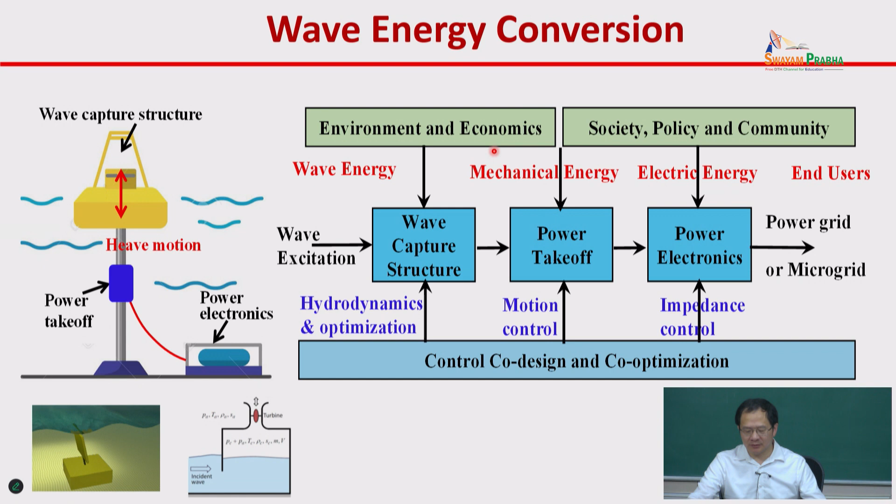And not only this control, hydrodynamics are important, right? The capture width ratio, how much energy gets converted to mechanical energy, is an important concept. Here you have motion control and impedance control. So control includes hydrodynamics control, motion control, and impedance control in power electronics. As I said, in the second half today we are going to talk about community, society, and environment for the design side.

Recall that capture width ratio is mechanical energy over wave energy. So total wave-to-wire efficiency includes capture width ratio and PTO efficiency. For certain devices we built, capture width ratio gets 50-60%, and PTO efficiency gets 50-80%. Keep in mind this is the best so far, and it's in a large range. For example, if you drive a PTO at a smaller load, the efficiency can be very small. The design is very important to make sure that the maximum efficiency of the two happens at the same condition. In that way, you have better power output.

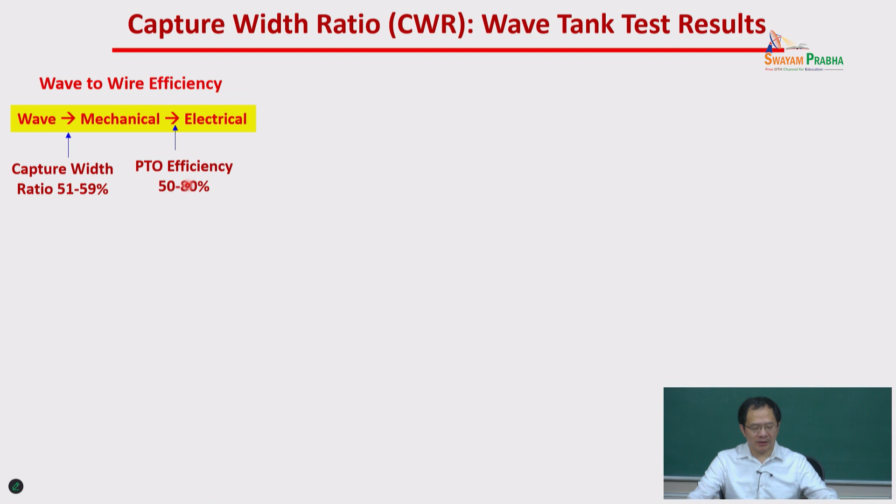So here, as you can see, the capture width ratio for different structures: a two body system has about 50 to 60%, the reference model 28%, and a single body 40%. And this depends on wave input. Here the wave flux for the scaled model is 7.4 watts per meter, corresponding to about 60 kilowatts at full scale. So if the input condition changes, the efficiency changes.

Okay, so and this capture width ratio. And overall, like this system, we get a 20% efficiency. As you can see, the power output, power history, and square root power corresponding to the voltage.

Here we use constant resistor. So the peak to average ratio is about 15, if you consider the root mean square of voltage is 4 times, right? So this 15 drives our design tool, because our PTO and all the motion transmission and power generator, and also power electronics, we need to handle the worst case, the big power, right?

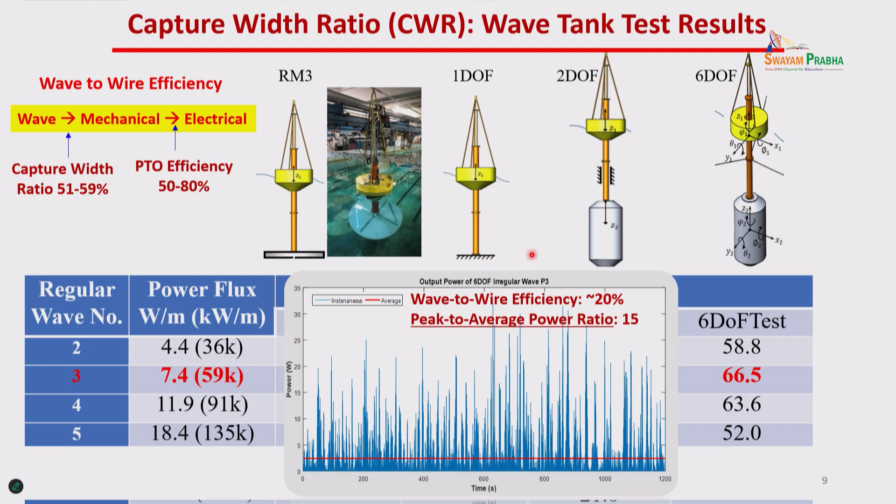Where we produce average like this. Okay, so now how to achieve best efficiency, we need to consider all this, right? And control can play an important role. This one I take from this reference paper. Okay, variable geometry wave energy converter design.

So it's written by Nathan Tom at NREL, and he provides this figure. As you know, you have wave amplitude, right? The wave is really small, like wind energy, very small. You have cut in speed. Below that, you don't generate energy, right? Like if wind speed is too large, you knock down the wind turbine, you don't generate electricity. Wave follows similar, right?

So at small wave speed, you don't generate energy, and if wave amplitude is above a certain number, okay, then you shed the load and make it flat, right? Then you have cut off, you just knock things down.

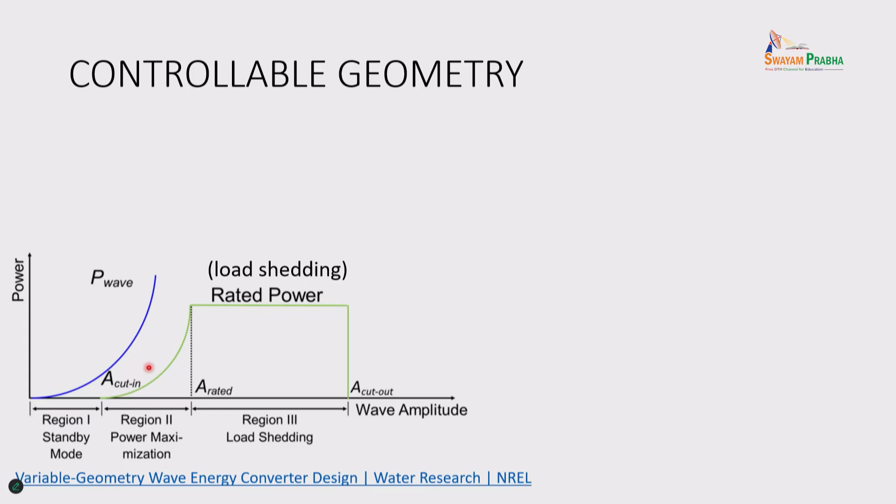This region is important, and for certain areas, for example, recently I traveled to Taiwan, and the collaborator said, okay, in Taiwan we need energy in the summer, because summer they need air conditioning, and wave energy is very small in summer, very large in the winter, right? So they don't want to say, okay, cut in this one, we want more to the left side as much as possible, so that at small wave speed we can generate energy.

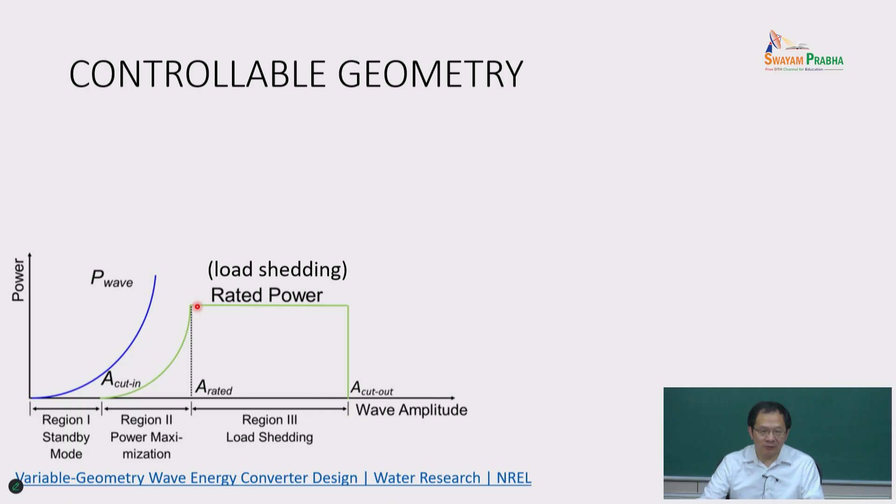What we can do? Okay, so that is one concept Nathan Tom and NREL proposed. Okay, you can say this oscillating wave surge device, and at a small wave, these windows are all closed. In that way, you have large excitation force. Therefore, you push this power curve to the left side.

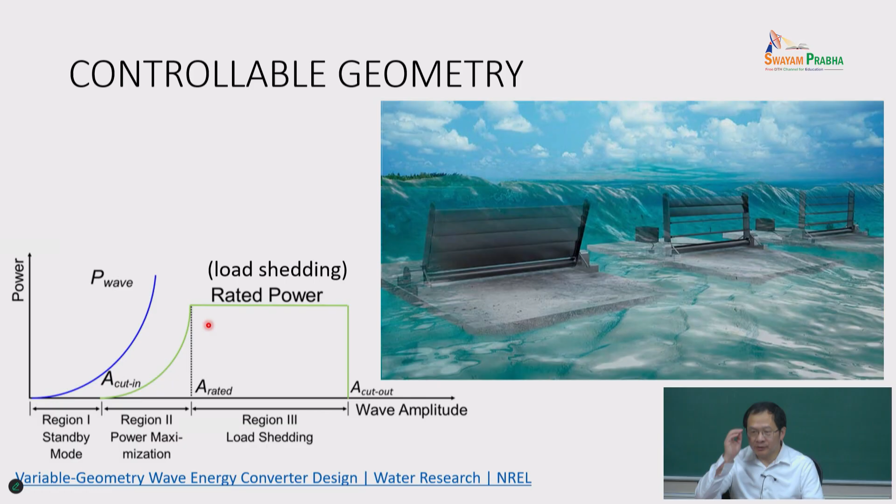It can work well at small wave conditions. Okay, and then if the wave is too large, then they open all the windows, right? When they open all the windows, it reduces the power. So that is control on our geometry side. Okay, so they also did an experiment and published this paper together with Krish at the University of Massachusetts.

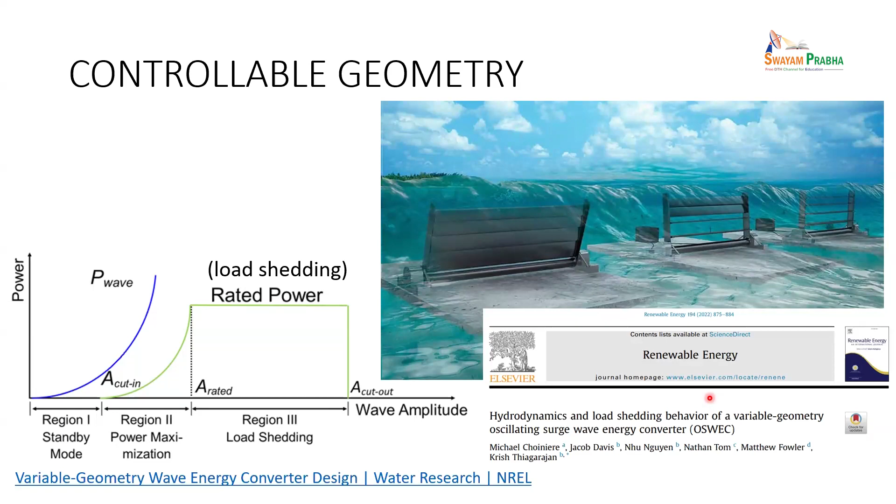So basically, you can say that floater, you can change the geometry, especially the water line. Water line, what's that water line? You remember, stiffness, right? Hydrostatic stiffness. So you have water line like that, you increase a large area, then you have larger stiffness, right? Or you deflate, then you have smaller. Okay, once you deflate, you have smaller surface area, water line area, okay, then you have smaller stiffness.

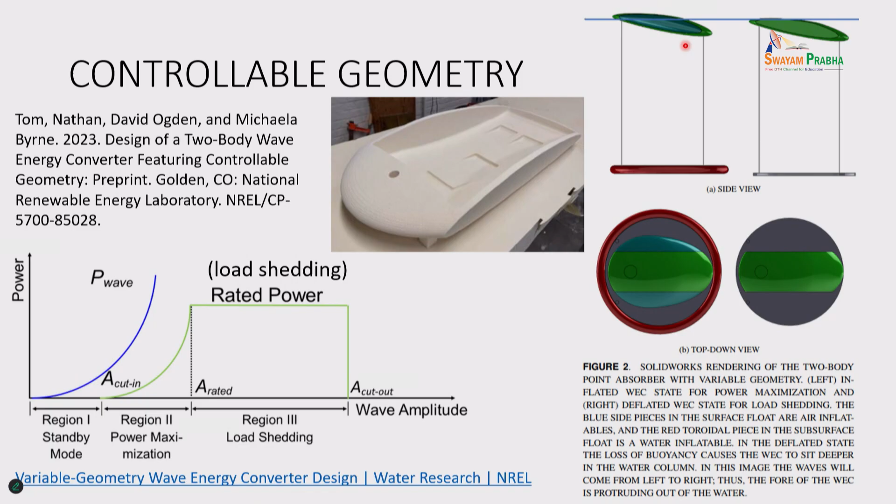Okay, this is controllable geometry. And overall, what we want to show, as I mentioned, is what they call LCOE in terms of dollars per kilowatt hour. This is a very important concept I want to highlight.

Okay, so overall system, you want to achieve low levelized cost of energy, LCOE, right? So you want to pay less dollars per kilowatt hour. How is LCOE calculated? Let me explain one by one.

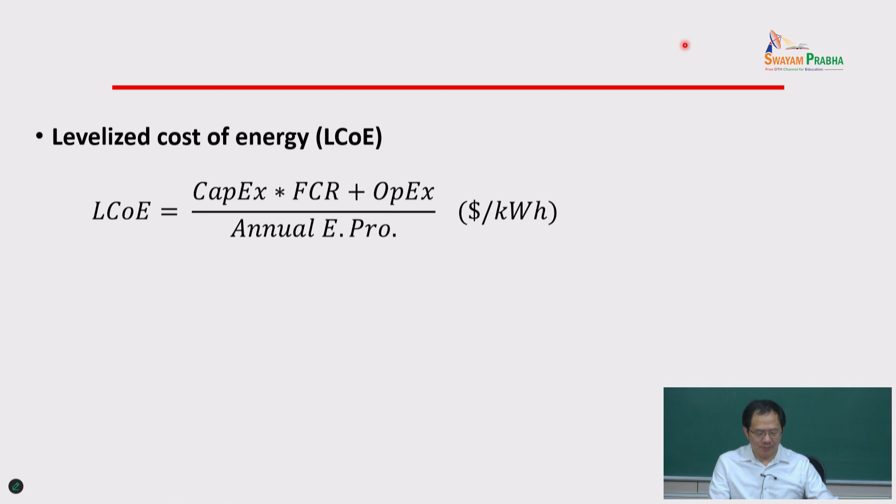The capital expense includes the manufacturing cost and deployment cost, and then it's normalized into the annual cost, called the fixed charge rate. So imagine you design the wave energy converter, and each year there's a cost - that is the fixed charge rate.

So overall it's capital cost. Second part, operation and maintenance cost - this includes normal operation and maintenance, and also environmental compliance cost. So the numerator side is in terms of dollars. Denominator is annual energy production, AEP - that is your power rate.

And the time unit converts into annual, 365 days, right? And there's another factor, capacity factor. For example, you rate the system at 100 kilowatts, but it doesn't always generate 100 kilowatts - some days you have days off. This capacity factor can typically be 30-50%, like this range.

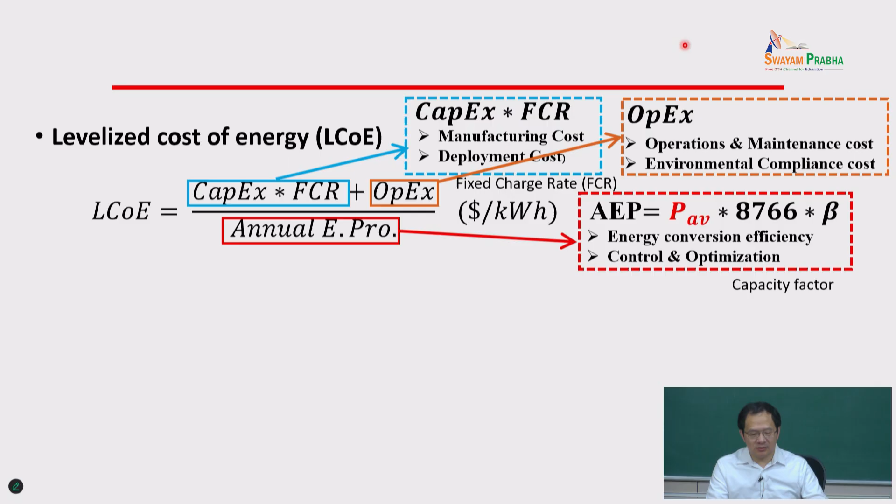So overall, you want to reduce dollars per kilowatt hour. Here, control can play a significant role. Some research already shows that without changing the structure, just using control, you can reduce the LCOE by half. Let me show how.

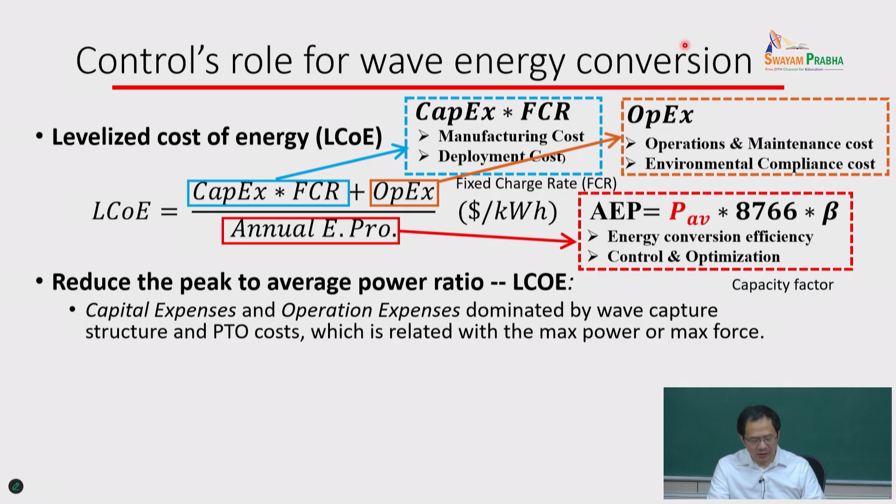One thing is you can reduce the peak-to-average power ratio. I already showed that in the simple passive resistor case, the peak-to-average power ratio is 15. This is very large - a 100 kilowatt device needs to handle 1500 kilowatts peak power. So now you can use control to reduce the peak-to-average ratio. Since all the power electronics are designed for the maximum load, not the average, if you reduce the peak, you can reduce the cost.

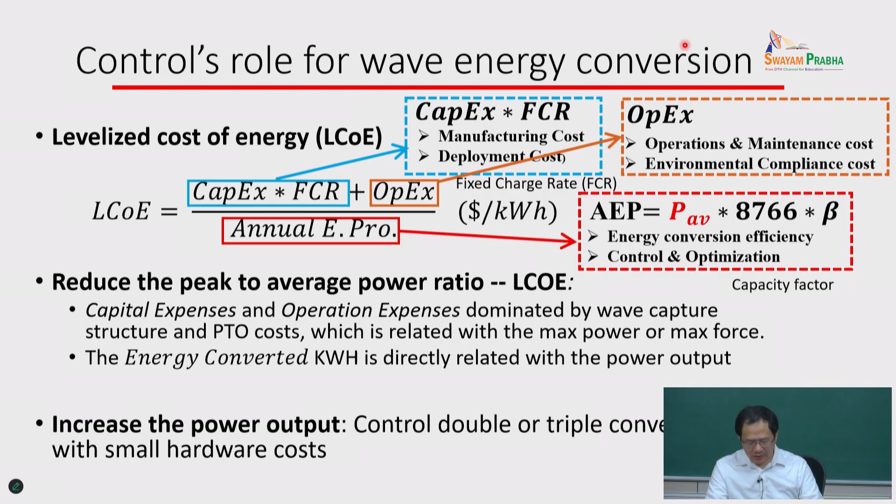And also, if you use control, you can increase the power output in kilowatt hours. So in that way, you can reduce the LCOE.

I took these slides from Professor John Ringwood's group at Maynooth. He showed two papers they studied, comparing different control methods.

So the black line shows constant resistor control. Then here it shows MPC, model predictive control - you can see it increases the average power output. Here it's also compared with latching control and LQ control. This other paper shows the time domain results.

And you have damping, optimal damping, right? Here you have different control strategies showing what kind of performance you can achieve. So overall, this shows that just by using control, you can achieve more power output, and in addition, you can reduce the peak load too.

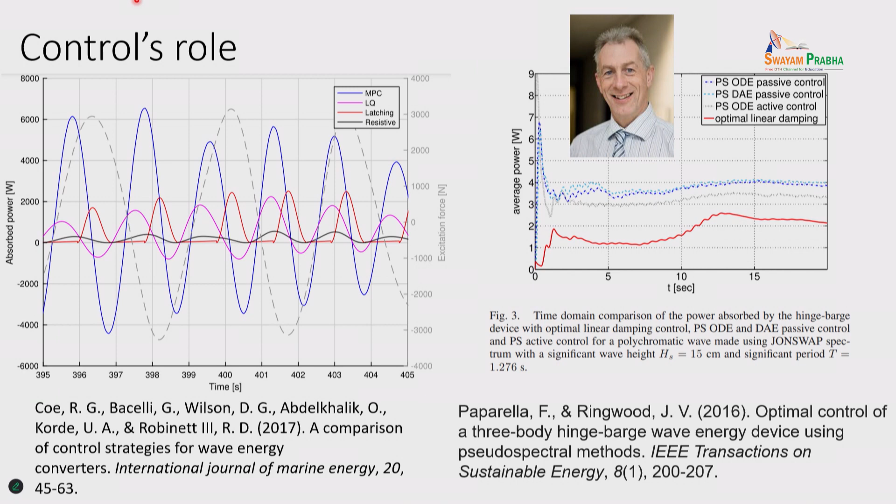So let's discuss the control concept. You have the buoy here, the free surface, and then the PTO. For the PTO, we assume there's a PTO force and a PTO velocity.

So the dynamic system follows Newton's law. This is the excitation force, this is the radiation force, actually including added mass effect and radiation damping effect - all of these are frequency dependent. Instead of using omega, they write S - S equals j omega, this is the Laplace transform.

So then you have hydrostatic stiffness and PTO force. Hydrostatic stiffness depends on the water line, the cross-section area. So you want to increase the power here - this is mechanical power. Later you will show this power going into the system.

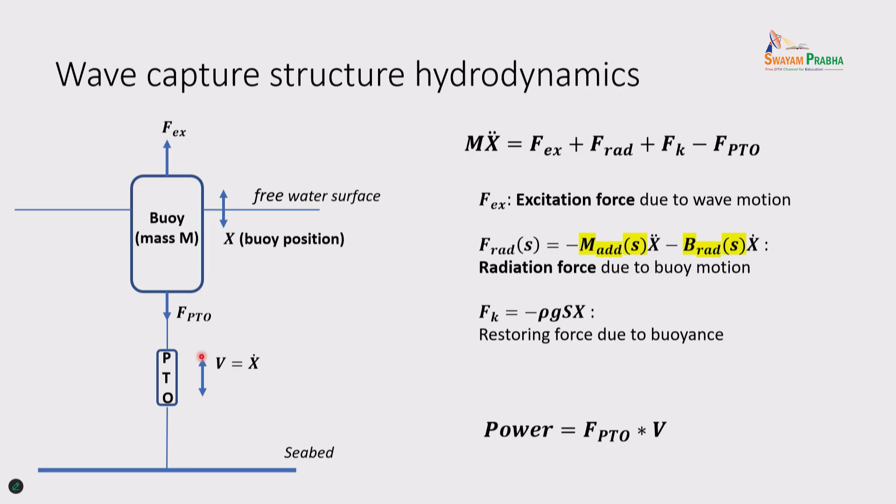PTO force and velocity - and later, when we consider the generator side, the power you really care about is voltage times current, the electricity. But for now, for the first step, let's consider PTO force times velocity.

So what's the control problem? You want more power output from the PTO - mechanical power output, that's PTO force times velocity. You do the integration, and it looks like this: you want to maximize the power output subject to velocity constraint, displacement constraint, and PTO force constraint.

So why is this different from the normal case? So, how many of you have learned LQ control, linear quadratic control?

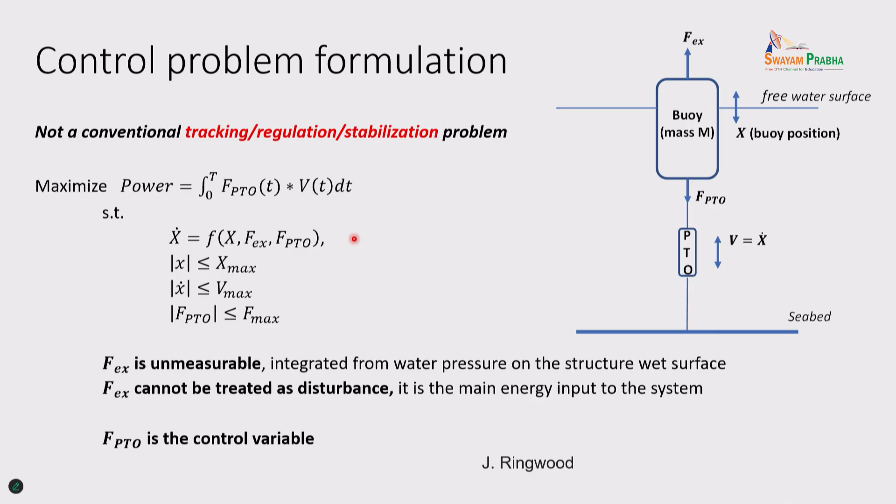If you look into linear quadratic control, people care about the x squared and u squared terms - this is the LQ term, and they normally don't care about the cross diagonal term. Here, in wave energy control, the cross diagonal term is more important.

In the last several lectures, I highlighted for regular wave at single frequency, what's the condition for maximum power? You match the frequency so the spring force and inertial force cancel - this is the resonance condition. And you match the PTO damping, which is the energy conversion induced damping, to match the radiation damping. Then you have maximum power output.

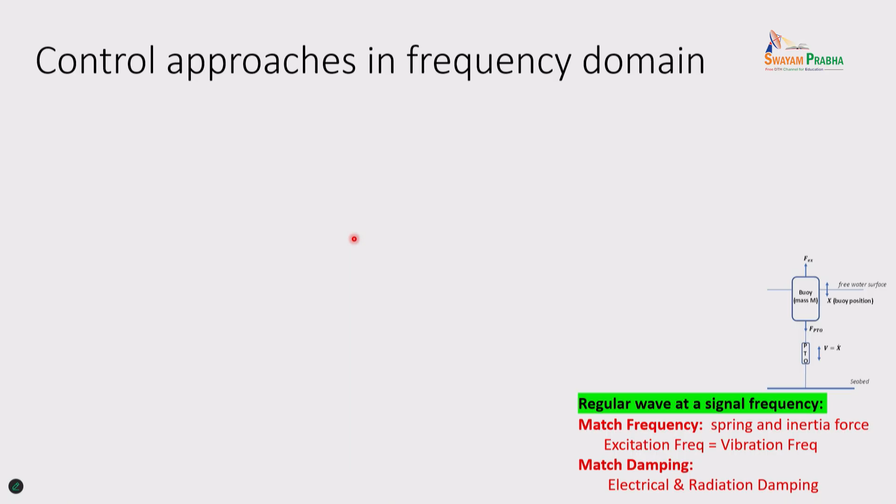Let's look at such a system from a control perspective. We talk about impedance, and we have this dynamics equation here. From this dynamic equation, you write in frequency domain - that is your physical mass, this is your added mass, and mass times acceleration gives the force. This s times velocity is the acceleration. So velocity dv/dt equals force. Now you have excitation force, then damping force times velocity.

Stiffness times integration of velocity gives displacement - 1 over s is the integration. You have PTO force, so you have velocity here.

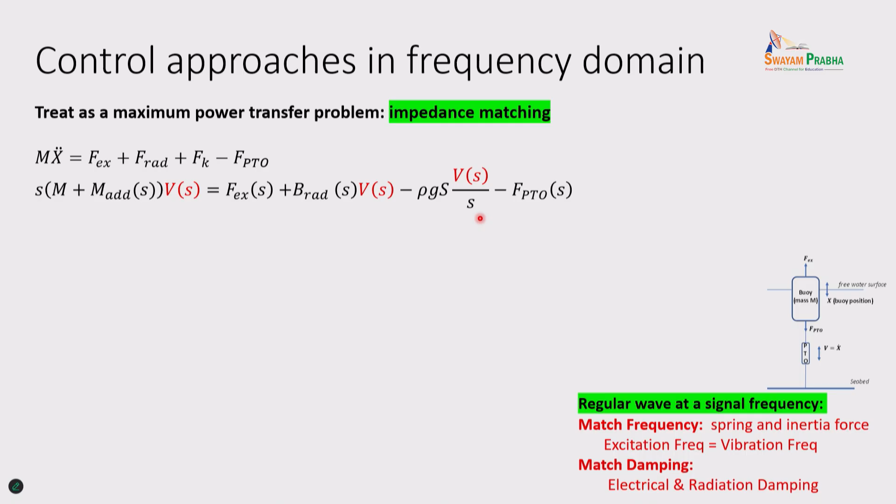Velocity impedance is defined as force divided by velocity. Now you take 1 over impedance, this is usually called admittance - velocity divided by this excitation force, this PTO force, this 1 over Gs. Gs is force divided by velocity. We call this admittance. So what does Gs look like?

You already have the expression here, and if you lump them together, you'll find Gs itself is the damping coefficient, and stiffness and mass times j omega. That is what we call - in the previous lecture we have j omega times mass.

K divided by j omega - the two forces cancellation is here. So that is in the Laplace domain, you write j omega as s, so that is s times mass, that is stiffness times, divided by s.

So there's one typo here - what's the typo? Because Vs is already here, this is 1, because this directly comes from here. You take s, or force divided by velocity - divide by velocity, velocity disappears. This velocity disappears, this velocity disappears, right? Make sense? If there's some typo, correct that.

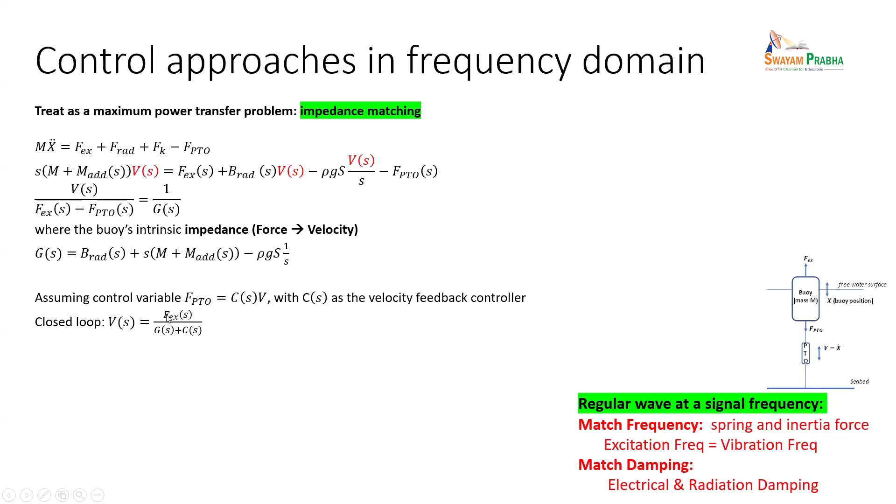This one - okay, so I push this first, click this first. So now this is the wave energy, Gs, force and velocity - that is your impedance. You measure velocity, you control the PTO force, and the PTO force and the excitation force totally add to the control system.

As I said, you assume you have velocity feedback, you control the PTO force. So that is the control. Now the closed loop system - you give this PTO force input, and Vs equals F excitation divided by G plus Cs. This is a control system.

So you guys learned this control or no? Right hand - this type of control? No? Mechanical engineers, you guys should learn control. Laplace transform you guys learned.

So that is the open loop Gs, force to velocity, and you measure the velocity, you generate force. And this force minus this excitation force, then you create this closed loop system, and after you close the loop, output and excitation force is Gs plus Cs. Similarly here, you get the power output and force times velocity.

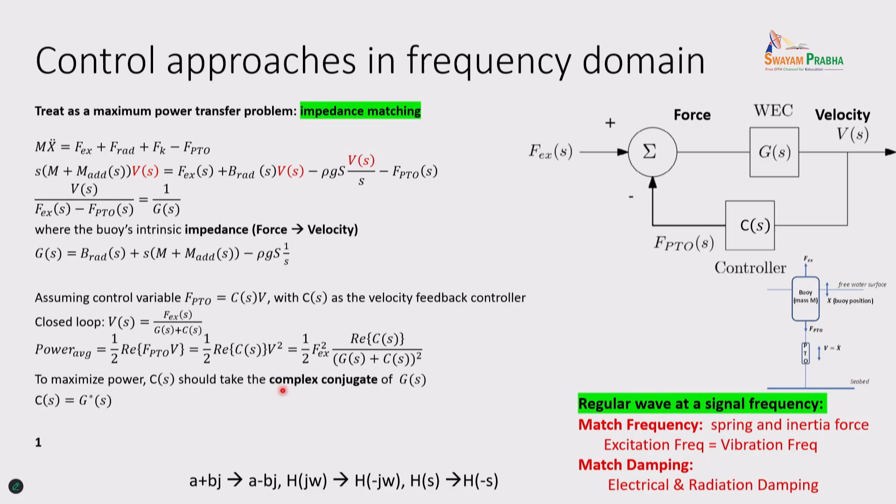You want to have self-conjugate control and complex conjugate, but this complex conjugate is not a causal system. For a non-causal system, you want to design a causal transfer function here to approximate that one particular transfer function. If you have one frequency, matching the frequency is really straightforward, but with broad frequency, you want to match all the frequencies, so that's more complicated. You need to design the approximation transfer function, the controller, so you can tune based on which frequency dominates.

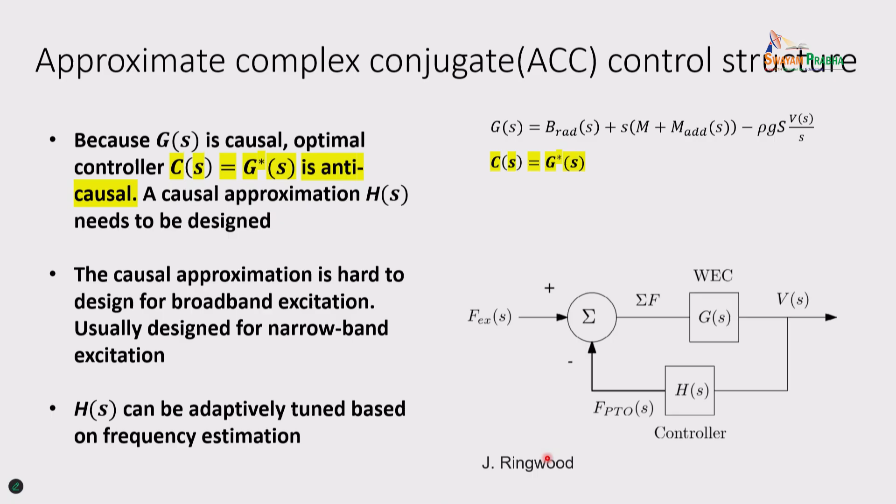That is called ACC control, or approximate complex conjugate control structure, right? And I have to give acknowledgement to Professor John Ringwood in Ireland, okay? And another is tracking control and approximate velocity tracking.

What does that mean? Okay, so instead of designing the controller, right, measure velocity and control the force, you do it that way. You don't do the force control, you do velocity control, right? Now you estimate the excitation force, and using this relationship, you calculate the ideal velocity of the buoy, right? You control the buoy, let it move at the ideal velocity. That is the reference velocity, right?

Now you can control your system to track the velocity. So that is the ideal velocity. You measure the velocity, right? And you design the velocity tracker. Instead of designing the force control, you design the velocity tracker. This is AVT control.

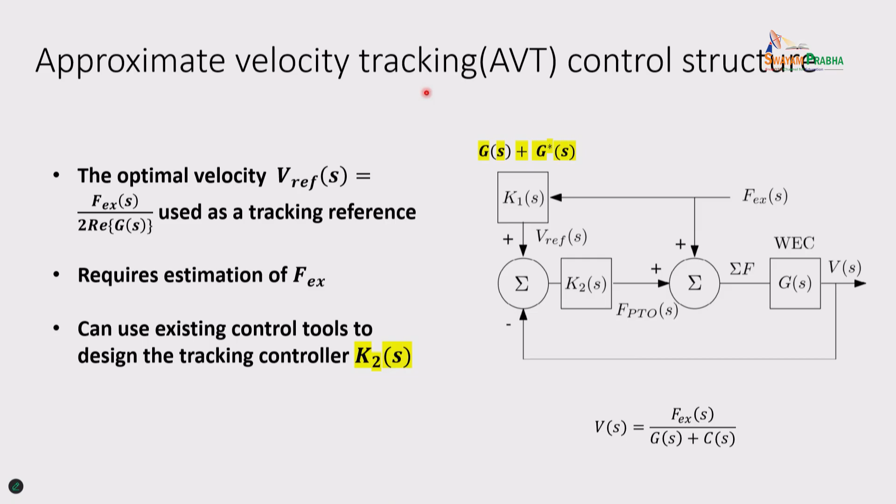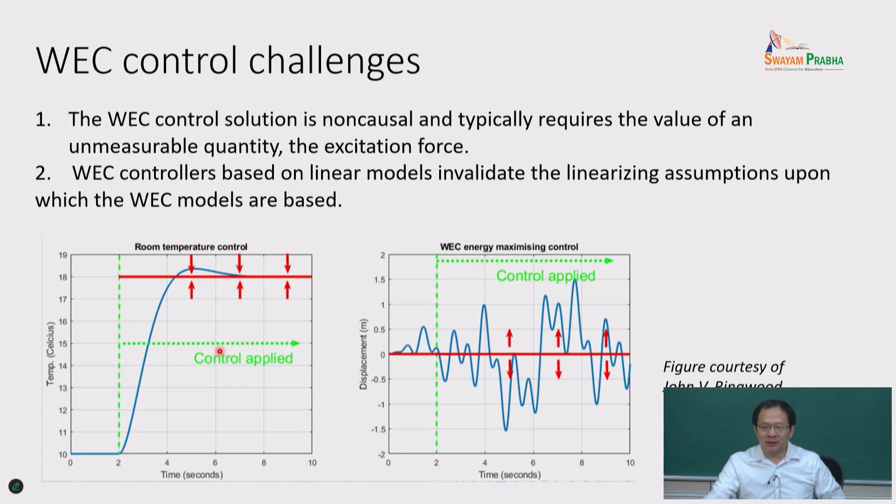So in wave energy control, there are a lot of challenges, right? Almost all vibration systems, no matter what, you want to reduce the vibration, right? Here, in wave energy, when you control it, you want to increase the motion so that you get more power, right? Instead of reducing the motion.

Or the hydrodynamics part, we said, okay, linear wave theory is so beautiful, right? Linear wave theory assumes small amplitude, right? And here, a lot of things are not that small, right? So when you implement the control, the motion amplitude increases, right? And that is different from a typical control system.

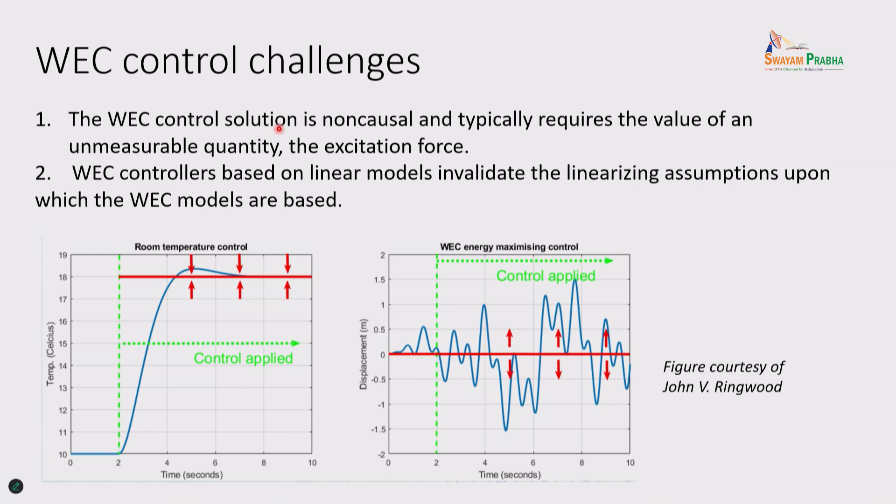Another thing is there's a force you cannot really measure, right? With this kind of buoy, not the flap, you can measure the velocity. You can measure the wave, but you cannot measure the force. However, calculating from the wave to the force is not causal. You remember, right? The force actually starts before the wave comes to the system, so it's not causal. So this causes problems.

And here I highlighted hydrodynamic control. You change the shape, right? I also mentioned the PTO control, where you can control the velocity and control the force in real time. Okay, so what does it mean to control force? You have a generator, you control the force. In the mechanical domain, you put in a force sensor and check the force.

And in the electrical domain, what will you do? You have motor force control. Keep in mind it generates force proportional to the current, right? Controlling force can also mean you control the current going through the generator. So that is motor generator current control, right? And you can have shape control, and you can also control the dynamic rotational inertia, right?

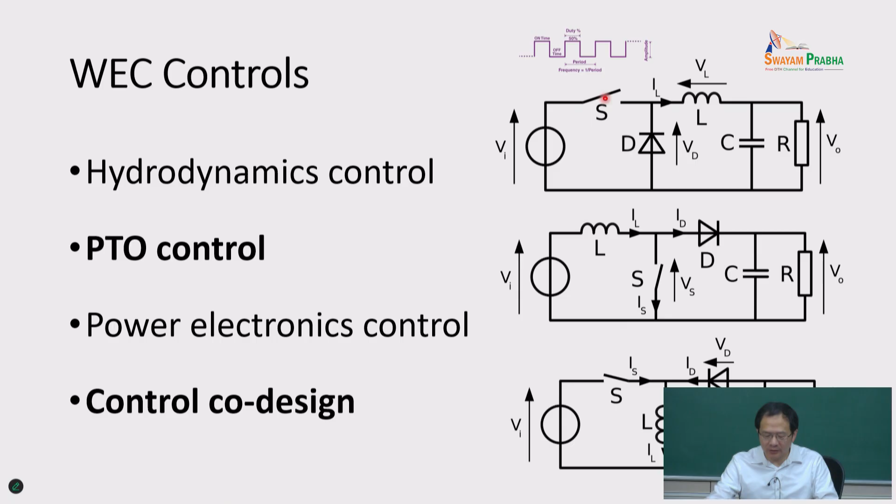And different control ways. We talked about power electronics, right? You have the wave generator. This is controlled with a step-down converter, step-up converter, a buck-boost converter, right? Here you use the duty cycle to control the switches. You control when the switch turns on and off, and you can charge and discharge this inductor. When you consider that, you calculate the input current and input voltage relationship. There's an input impedance, and that input impedance can be controlled in the electric domain.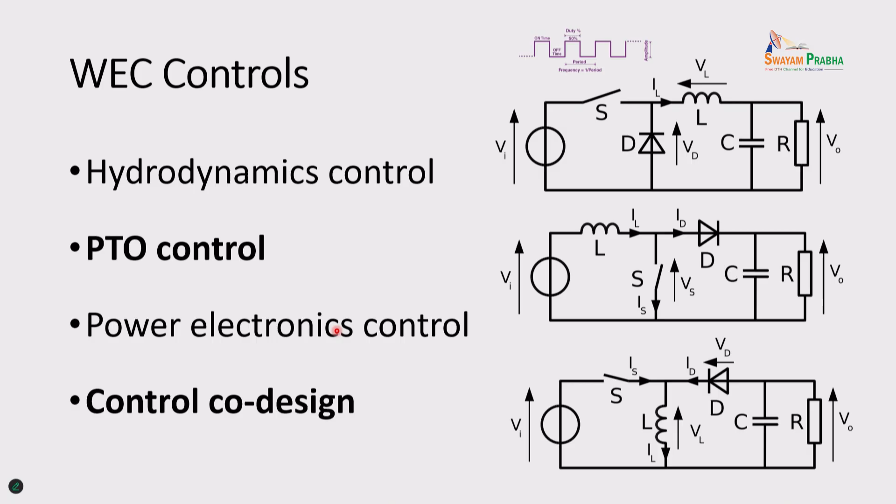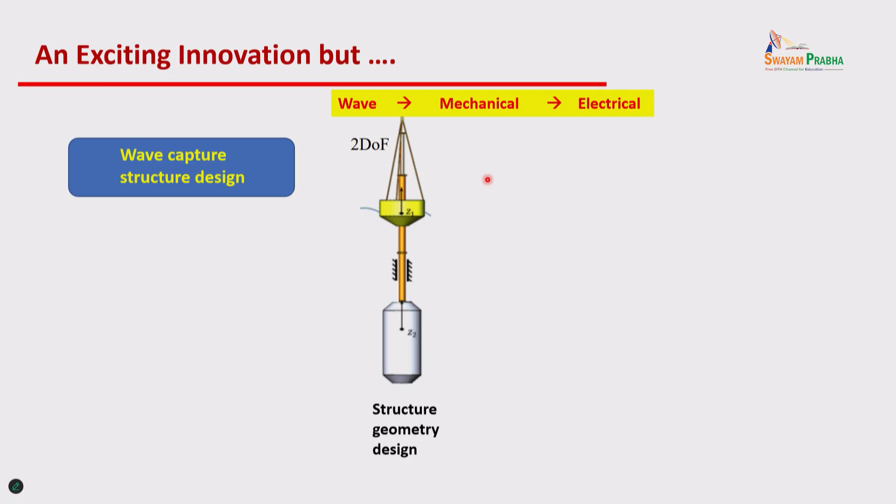Okay, so that's the power electronics side. So here I want to recall the co-design concept, and I'll give you this example of what we learned: the mechanical motion rectifier. We said, okay, this moves up and down, and we convert the bidirectional motion into single-direction rotation. It's a very exciting innovation, right? No matter whether it moves up or down, my generator always turns in one direction.

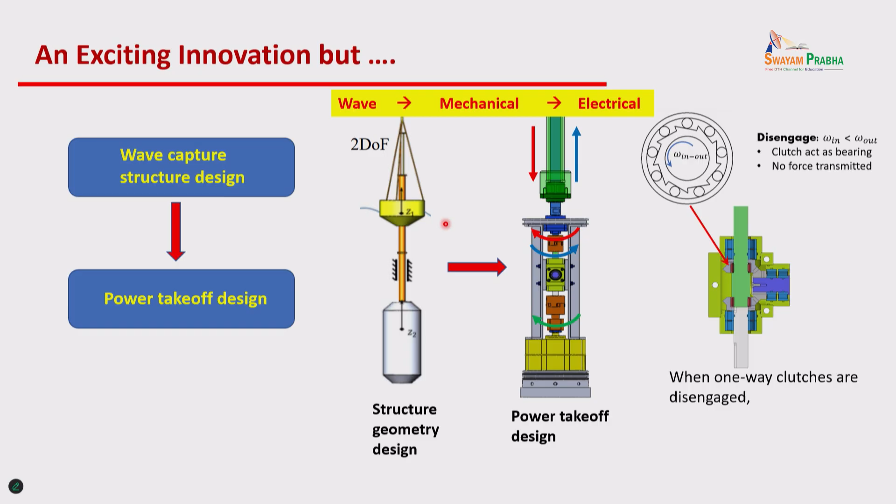So you design the buoy and your teammate designs the PTO. You add another teammate and say, hey, your job is to do the control. What happens after that, you three guys? Just imagine you design the buoy, it's easy. You design the shape, look into the hydrodynamics part, right? Then another person designs the PTO. Now give another guy the control. What can he do? He finds out, wow, I cannot control that.

Sometimes your stiffness is too high, so I need to cancel the stiffness. Cancel stiffness means I need to give energy to the buoy, right? You generate the force, and it is negative to the velocity, right? If this system's generator or motor cannot drive back, then in this type of case you lose control. That's called controllability, right? You lose controllability, then you can do nothing, right?

It's innovative, exciting, but failed. So that means we need to consider the things together. You three, the PTO designer, the shape hydrodynamics guy, and another guy who's the controller, discuss together, right? You cannot say I came up with something very, very exciting. From my perspective it's great, but now others are hard, right? So that is control co-design, and you can think that way.

One example: you book the flight to travel to the US, right? And you stop by from one flight to another. You can say first segment, second segment, right? Now you want to minimize the cost. You cannot say I minimize my first segment, then you will find, wow, the second segment is very expensive. Make sense? You need to consider the overall trajectory, then you minimize the cost.

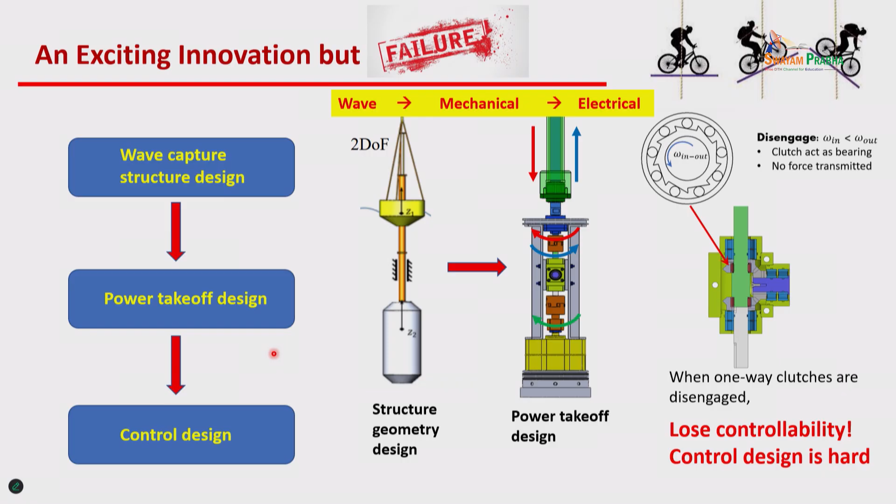Similarly, the wave structure and PTO side control, we need to consider them together, right? It's more like optimization iteration from the beginning. You cannot say, okay, PTO guy, you design the system and give this to the control engineer to handle that. This is the control co-design concept. It's all about engineering system-level design and iteration.

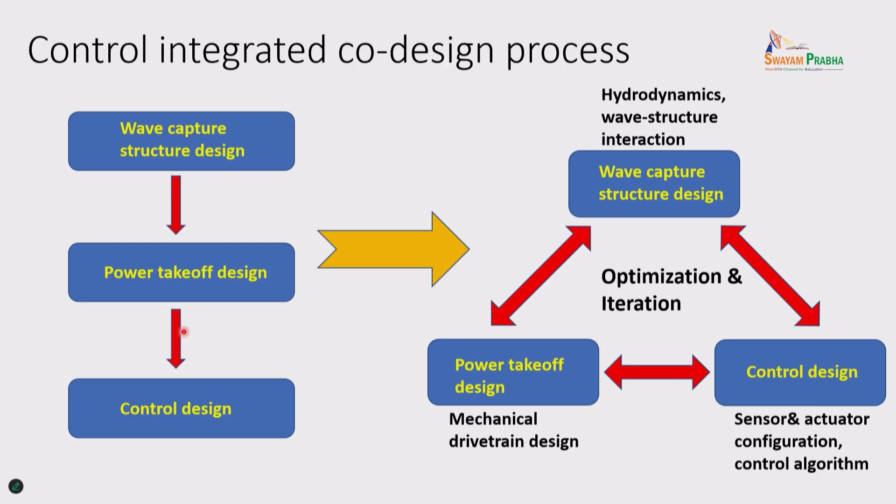Okay, so I give you one example about control co-design. More details you can find in these papers: one paper is by Giorgio, another is our collaboration together with Giorgio too, and the National Lab. The control co-design concept is like this. You have wave excitation, for example, to the buoy. You have the PTO to convert it into useful power. In this, you have to consider all kinds of efficiency loss, right?

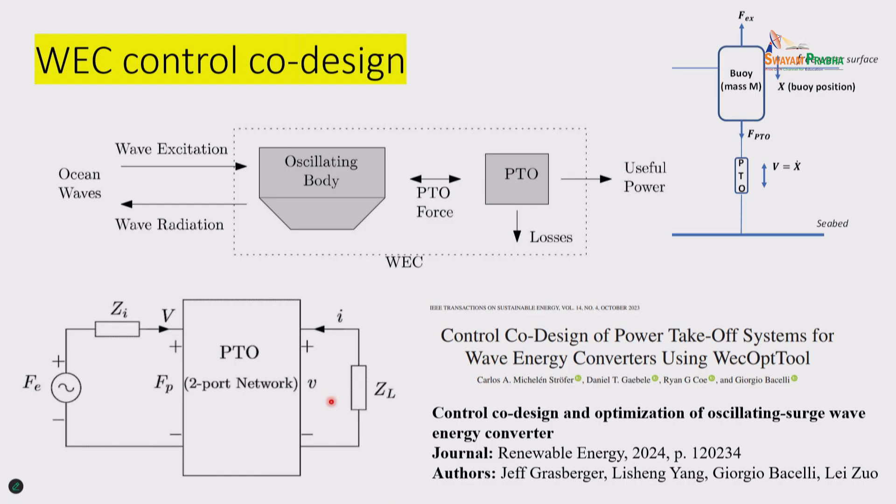I will explain a little bit more about these terminals. You have excitation force, you have input impedance, right? And then eventually, using the generator, you generate voltage, and you shunt the load, you get current. So let us say in a system like that one, a flap. The flap rotates, then drives a generator. In the system there's mechanical damping and mechanical stiffness. The generator generates a voltage. However, you have generator internal impedance. Let us go one by one.

So the first part, I already told you, is impedance. The impedance relationship is the force and velocity, or torque and rotation velocity relationship, right? So that is impedance Zi. And impedance Z times omega velocity here equals the difference of the PTO torque and the excitation torque. So this is the flap impedance.

The second part is the PTO's efficiency, impedance. The PTO is a powertrain system, right? You may have rotation inertia. You will have mechanical damping in the ball screw system. You can have PTO stiffness. That is the impedance of the PTO side. Again, just imagine it that way. The ball screw has rotation inertia, the ball screw system has damping, and you may have a spring in parallel with the ball screw, that is stiffness.

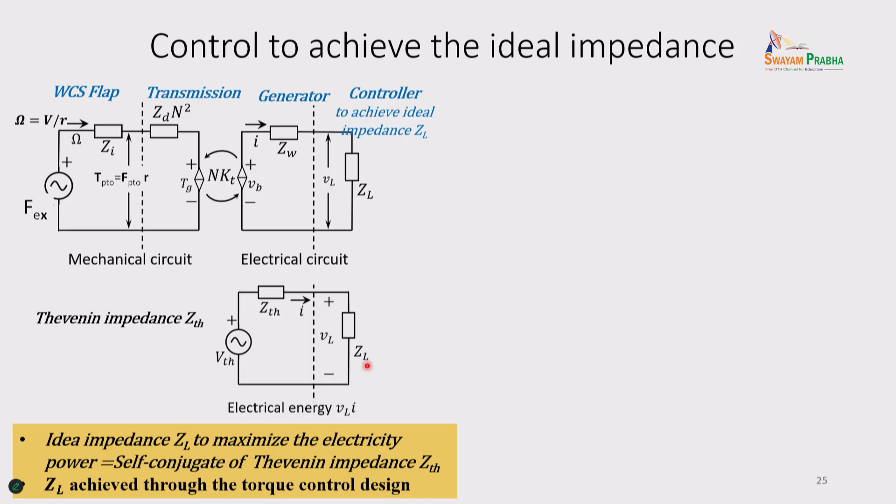Now, if you use AC voltage, there's a real part and an imaginary part. Then, when you want to maximize, you have the complex conjugate, right? We highlight this again and again. Have the complex conjugate. So now, how are you going to use control to achieve the ideal load impedance? Here, I want to highlight one case. Very simple understanding.

So you measure the generator's velocity, omega, right? You want to control the torque or control the current. You design the controller ZC, and here we take ZC as a PID controller. This is P gain and integration gain times velocity, right? And velocity times P is more like a stiffness effect... Let me say that what I said is wrong.

Okay, velocity times Kp, what's that? Damping, right? Velocity times a constant generates force, that's damping. And velocity times the I gain divided by j omega, what's that? 1 over j omega you can consider as 1 over s. 1 over s means integration. Velocity integration will be displacement. So this is the damping term, this is the stiffness term.

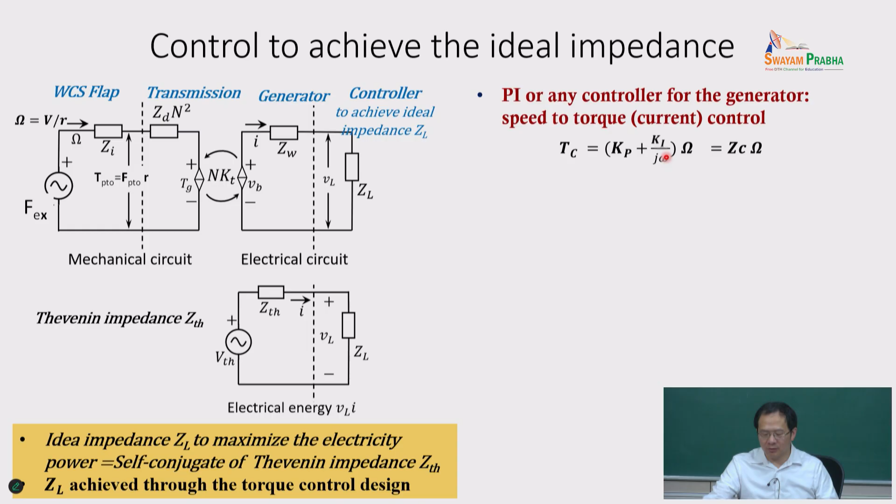I say again. So that is torque, that is velocity, right? Velocity times a gain corresponds to damping. Velocity divided by s, 1 over j omega, is the displacement. Displacement times a gain, that is stiffness. So Kp corresponds to damping, Ki corresponds to the spring. Let us say you design a very simple PI control with velocity feedback. You control the torque or the torque current. The system is like that.

This two-terminal system, right? The terminal corresponds to here, combined with the torque. And then you have the velocity here. You measure velocity, you measure speed, right? And generate torque. And then the torque and the input torque add together. That's the total torque to the PTO system, right?

PTO system here, the first item, that is ZD, right? And for example here, the voltage and current relationship, you have ZW, right? And from the torque to voltage is coupling through here, right?

Okay, this is break time. Okay, so give me a quick moment.

So anyway, what I mean is you give velocity, right? And you control the torque. And you want to achieve the closed-loop voltage-current relationship, which is impedance ZL, right? Now based on this, you write a closed loop. Basically, you control the motor: measure speed, control the torque or current, achieve the ideal electric impedance. So that is to show how the impedance is controlled with motor torque control.

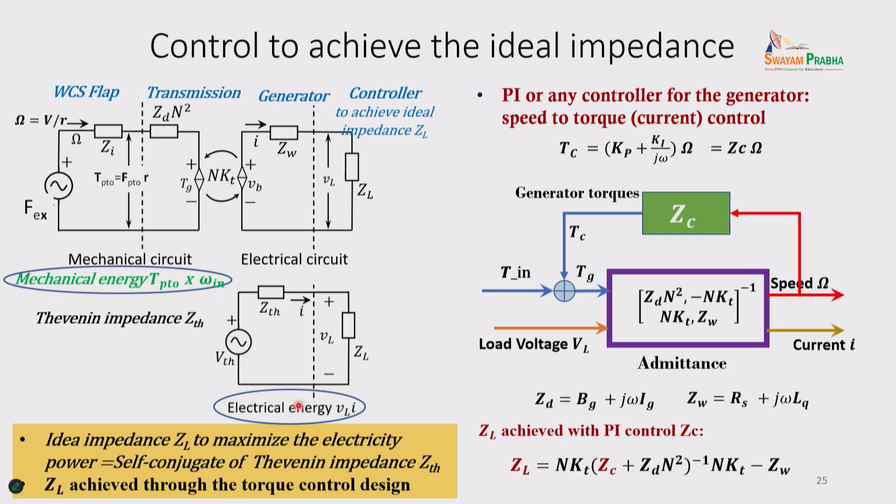Let us take a break. After the break, we can continue. Okay, yeah.

Okay, thank you. I need to teach you a little bit faster. Problem is hard. I didn't realize you guys didn't learn control. It's fine. Don't get scared. You now know Fourier transformation. You know Laplace. Then you can learn that.

I'm going to finish the control co-design part. Then after that, we are going to talk a little bit more beyond the engineering control co-design. Just now in the break I chatted, most students are in ocean engineering and you didn't learn control. It's fine. In my undergraduate study, I didn't learn control either. Later, I learned control in graduate school and also read some books myself. Okay, so

control co-design, as you can see, is a nice framework that allows you to consider the hydrodynamics part, mechanical transmission part, generator part, and the feedback control part. You put everything together. Now it's a nice framework. You can consider the mechanical power and electrical power.

Mechanical power basically is torque and rotation speed. And in that part, you take that as output impedance. And the electrical part, you consider all the impedance lumped together, and you can maximize the power output, I mean electrical power output, considering feedback control. I give you the result here, and more details you can find in the paper.

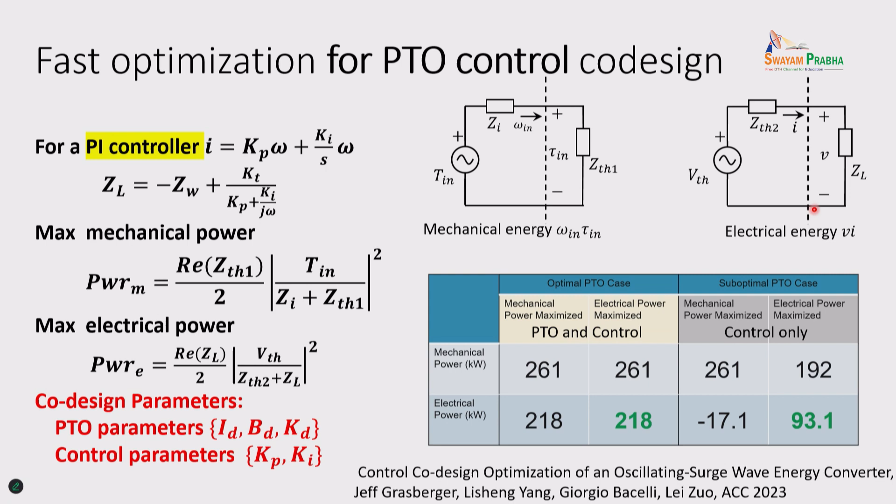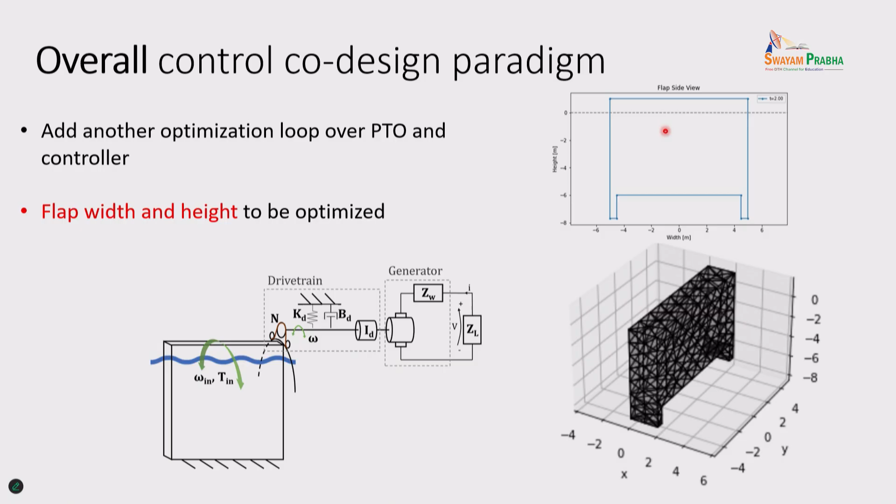we also can do further optimization, in which we can consider the geometry design. For example, in this one, we consider the flap's width and height in the system. And in this one, we take a two-loop design. The first loop, we design the PTO's rotation inertia, PTO's damping, and electrical gear ratio, considering coupling coefficients, considering the transmission ratio. The outside loop, we consider x dimension, y dimension.

So each one outside, we more like separate into different case studies and do the complicated two-loop system to maximize the power output, and meanwhile reduce the load to the flap, the pressure per area. Details are in this paper.

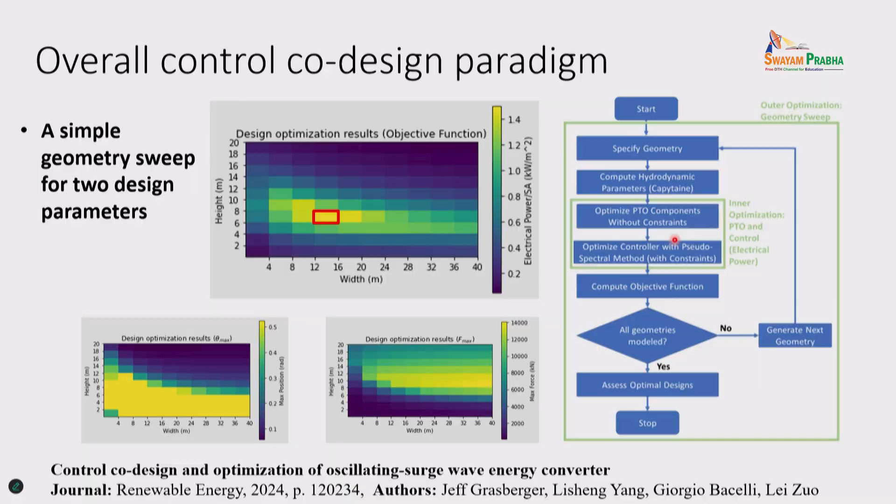Okay, so I stop 1 or 2 minutes. I just want to get you guys to think about the control co-design framework. Control co-design, I normally say we put a control engineer or the chief engineer, you think about that. And it can be a little bit broader. Instead of control co-design, we call it engineering co-design or system-level co-design.

Basically, you need to consider from the structure side, shape, geometry, to the PTO design, rotation inertia, ball screw transmission, or the type of system, or rack pinion, whatever like that. And we also need to consider how to control the system. It can be very simple PID control, and it can be model predictive control.

No matter what, we need to consider all the engineering system together, including structure side, PTO side, control side. You put it in one nice framework. So this is engineering system co-design. And you get a sense, wow, wave energy, very complicated system. Vibration, fluid, control, power electronics, dynamics, design. It's complicated. As I said, this area is large.